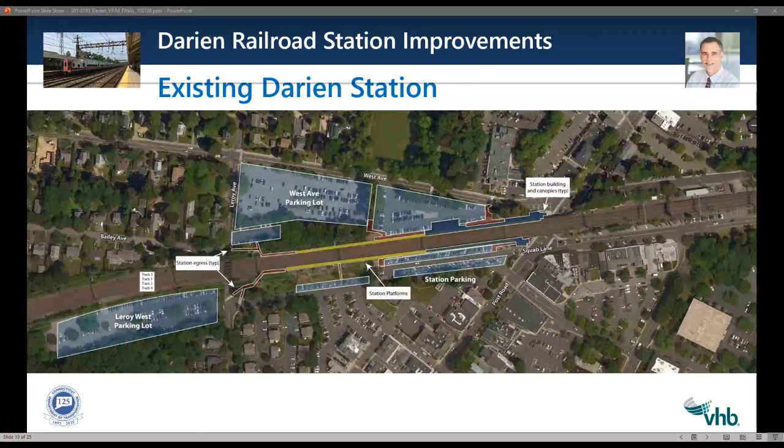This all sounds pretty good. So why are we here?

In 2016, the Connecticut Department of Transportation commissioned an assessment of 43 of Connecticut's commuter rail stations. Under the program, an evaluation, visual inspection, and limited physical testing of items such as the platforms, canopies, and station buildings was conducted. This included evaluations of architectural, structural, mechanical, and electrical systems, as well as a check of ADA elements for compliance. The information collected from the assessment was used to establish current conditions at each station in order to develop a prioritized repair and improvement program.

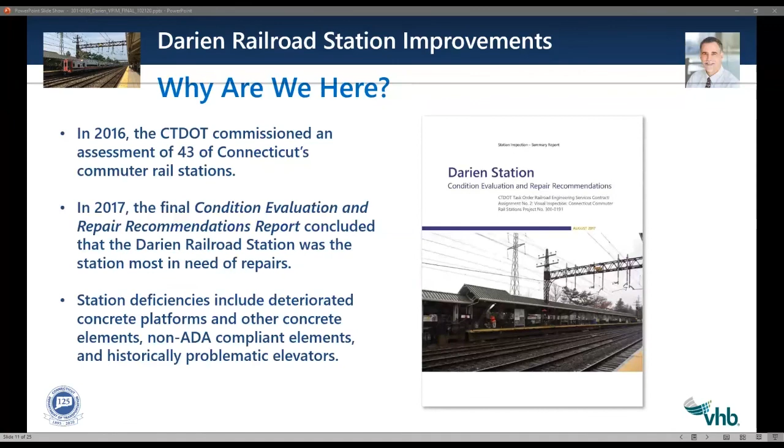In 2017, the final condition evaluation and repair recommendations report found that the Darien Railroad Station ranked as the station in most need of repairs. At the Darien Station, deficiencies include deteriorated concrete platforms and other concrete elements, such as the platform foundations, non-ADA compliant elements such as ramps with greater than allowable slopes, and historically problematic and often out of service elevators.

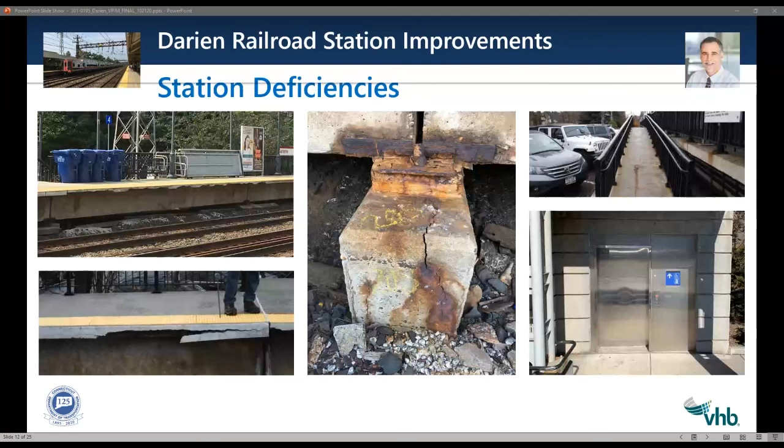As part of this project, we are going to address those deficiencies, and then some. Highlights of the proposed project construction include the following: replacement of four catenary structures within the project limits. This includes the structure at the east end of the project, which will be reconstructed on the outside of the platform and canopy. The existing concrete double T platforms are proposed to be replaced with electric heated fiber reinforced polymer, or FRP, transit panels.

For those of you familiar with Noroton Heights, a similar approach will be taken here, with the exception that at Noroton Heights, non-heated precast concrete panels were installed. I'll go into more detail on the heated FRP transit panel system in a few minutes.

The existing concrete stair and ramp structures to and from the platforms will be replaced with heated FRP systems. The landings for these stairs and ramps will also receive a heated FRP overlay to prevent icing conditions. New guardrails and handrails will be installed on the platforms, ramps, stairs, and walkways to ensure ADA compliance.

Both existing electric traction elevators will be replaced with more robust hydraulic units, which will also require the installation of new, larger machine control rooms. In addition, a full-length windscreen vestibule system will be installed at the elevator entrances.

All existing platform and canopy signage will be replaced with new signage meeting current requirements. All existing platform, ramp, and stair lighting will be replaced. In areas not covered by canopies, new freestanding poles will be installed off of the platforms and will utilize LED fixtures. Lighting attached to the existing platform canopies to remain will be replaced with new LED fixtures.

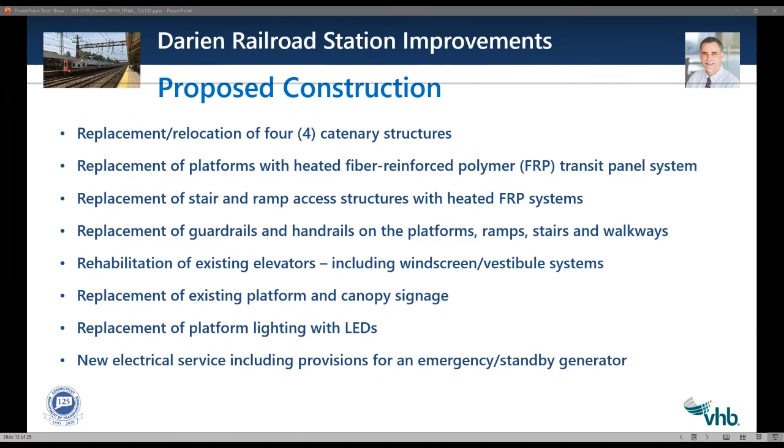Proposed Construction Plan 2 shows an overview of the east half of the project. As with Construction Plan 1, the new catenary structures are shown in dark blue, the heated FRP platforms in yellow, heated FRP stair and ramp access structures in light blue, concrete sidewalks with heated FRP overlay in purple, and new concrete sidewalks and stairs in orange. This slide also gives you a better feel for the extent of the new concrete sidewalks being proposed.

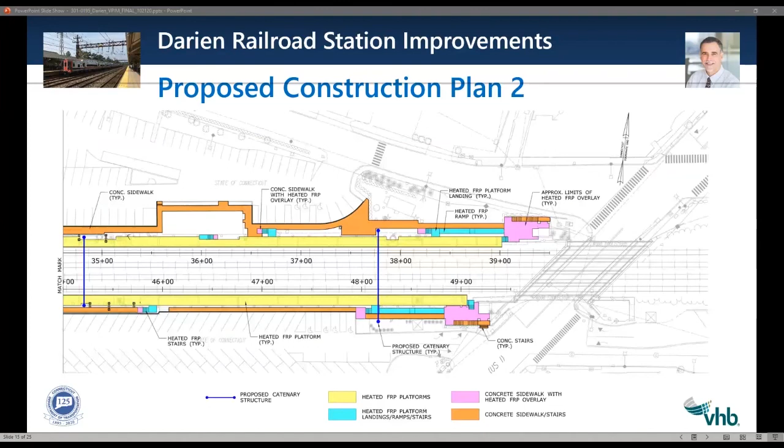As mentioned earlier, one of the elements unique to this project is the use of electric heated FRP transit panels for the platform surface. In the section on the left of this slide, it looks similar to what was done at Noroton Heights, in that the existing platform foundations will be repaired, new concrete pedestals will be built, and a steel stringer system will be installed to support the platform surface, in this case, the FRP panels.

The exploded view on the right gives you a better idea of the heated FRP transit panel system itself. 2 foot deep by 4 foot wide individual modular FRP units sit inside 10 foot deep steel panel frames. Each modular FRP unit contains an integrated heating membrane and a textured non-slip walkable surface.

The only exception is the unit at the front, or track side, of the platform, which will have an FRP tactile warning surface panel installed on top. All FRP units, including the one with the tactile warning surface, will be heated.

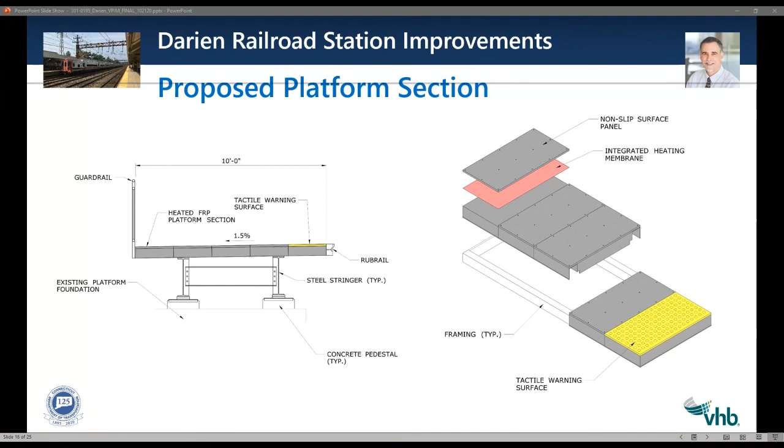Now that you have an idea of what the station is going to look like at the end, I'm sure many of you are wondering what it's going to be like during construction and how it's going to impact you. With that, let me show you how, at this time, we are planning to get there. I'll start with the construction staging and laydown area.

While coordination between the Connecticut Department of Transportation and the town of Darien is ongoing, at this time, we anticipate the contractor will utilize the extreme west end of the Leroy West parking lot. Both the contractor and the state, who will be overseeing construction, would have their field trailers in this location. In addition, the contractor would use the area to store materials and equipment throughout the duration of construction.

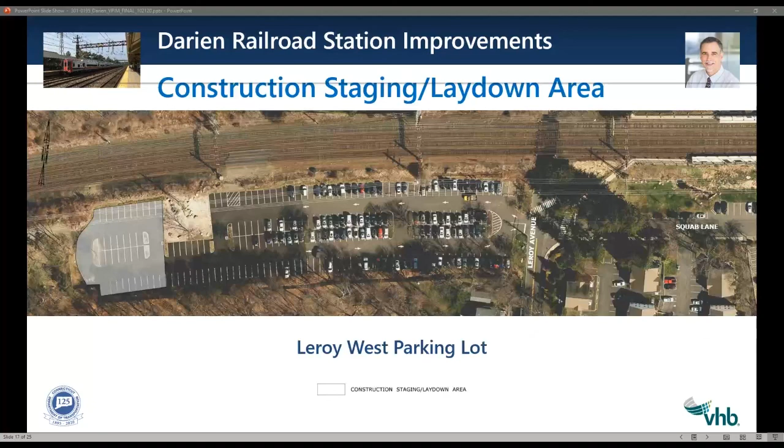Now on to the construction stages themselves. Construction stage 1 focuses on the catenary system and has an anticipated duration of 6 months. 4 new catenary structures will be built to the west of the existing structures, including relocating the easternmost catenary structure from within the platform to behind it. The wires associated with the catenary system will be relocated, and finally, the existing structures will be removed. As shown in red hatching, parking spaces on both the north and south sides of the tracks will be temporarily lost in this stage to accommodate the work.

Construction stage 2 focuses on the removal and replacement of the existing platforms and access structures on the east half of the north platform. With an anticipated duration of 7 months, this stage also includes construction of new elevator machine rooms on both the north and south sides, rehabilitation of both the north and south elevators, including installation of full-length windscreen vestibule systems, and installation of the north side electrical service, including provisions for the emergency standby generator.

As well as other incidental works such as new canopy-mounted lighting. This stage requires a temporary loss of parking spaces on both the east and west sides of the existing station building. Of note is that both elevators will be out of service for the duration of this stage.

With the east half of the north platform and rehabilitation of both elevators complete and open to the traveling public, construction stage 3 focuses on the removal and replacement of the existing platforms and access structures on the west half of the north platform. With an anticipated duration of 6 months, this stage also includes other incidental work such as sidewalks and new light poles and fixtures. Parking spaces west of the existing station building will be temporarily lost in this stage to accommodate the work.

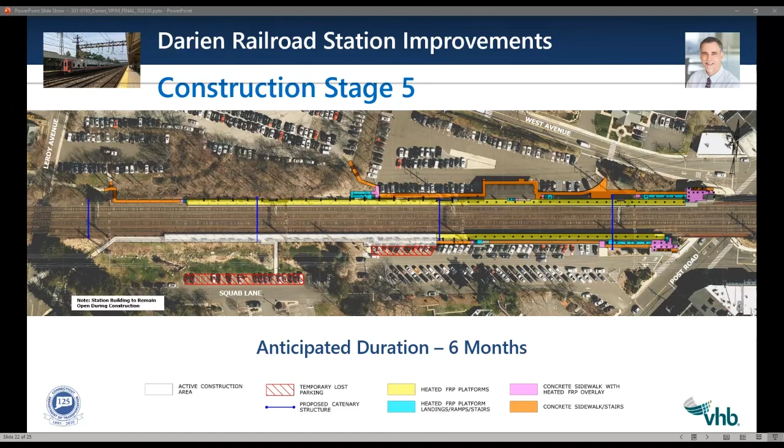With the east half of the south platform complete and open to the traveling public, construction stage 5 focuses on the removal and replacement of the existing platforms and access structures on the west half of the south platform. With an anticipated duration of 6 months, this stage also includes incidental work such as sidewalks and new light poles and fixtures. Parking spaces behind the platform, as well as along Squab Lane, will be temporarily lost in this stage to accommodate the work.

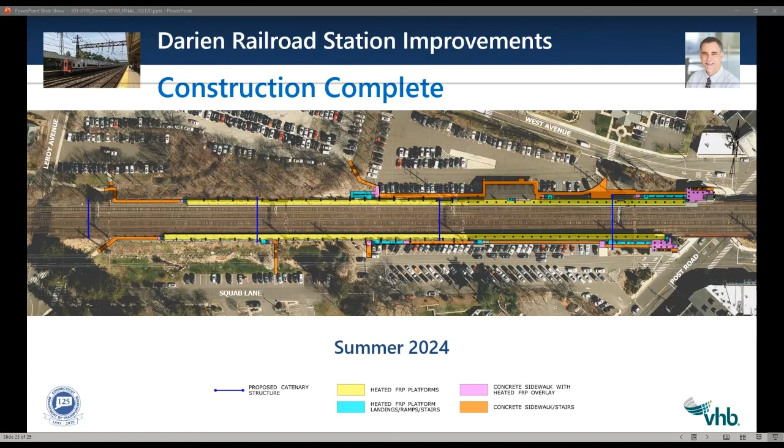At this time, construction is anticipated to be complete by the summer of 2024, which brings us to the project schedule. The project is currently in the semi-final design phase, with the 60% design expected to be submitted by the end of the year. Design completion is anticipated in June of 2021, at which time the contract documents will be processed by the Connecticut Department of Transportation and the project put out to bid. Contractor notice to proceed is anticipated in November of 2021, and construction is expected to start in February of 2022. Based on the durations noted in the previous slides, the construction completion date is currently estimated to be July of 2024. I will now turn things back over to Yuri for the question and answer session.

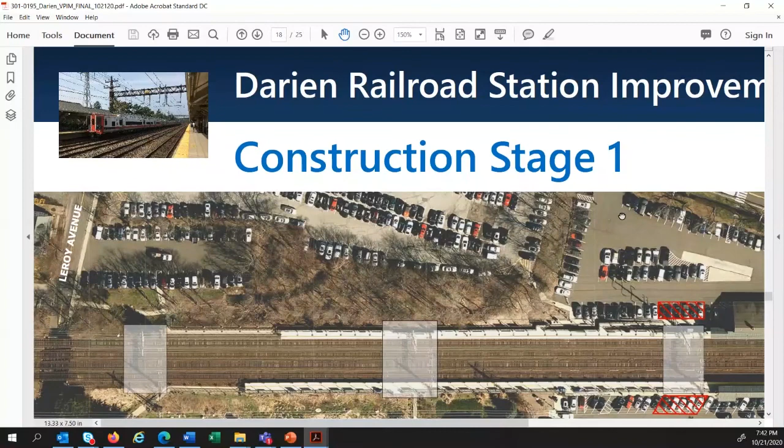So the existing utility shed storage building is located right where my cursor hand is right here. The proposed generator is going to be located approximately just 10-15 feet behind here, in the area where my hand is. So on the north side, between West Avenue and the platform on the north side with the canopies. There will be some impact to the trees in that area to put that in there, but there is going to be a landscape mitigation plan that will take care of that.

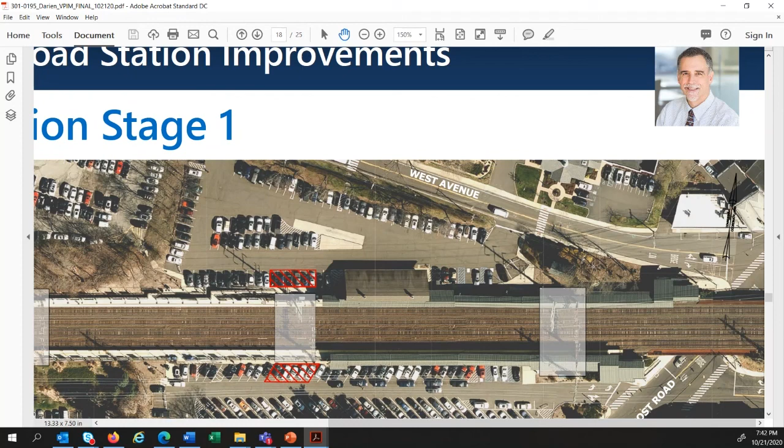Thank you, Tony. Do you want to expand a little bit, Tony, about the purpose of the standby generator and a little bit about what we plan on doing there at Darien? Sure, John, no problem. As I mentioned earlier, there's going to be 2 new electrical services, one on the north side and one on the south side, to feed the lighting for the platform.

The electric heated FRP transit panel system will also be fed from the service. And then miscellaneous electrical, there will be convenience outlets for Metro North's use on light fixtures and other little items such as that. So the emergency generator will be located on the north side, but it will provide backup power to both the north and south sides. As I mentioned in the earlier presentation, it will not provide heating for the platform - the load is just too much for a standby generator - but it will provide emergency lighting, not just to the levels required for emergency lighting. It will be providing full lighting all the way on the platforms and down the ramps and stairs to the public way. It will also be tied into the station building to provide heat for the building in the event of a power failure.

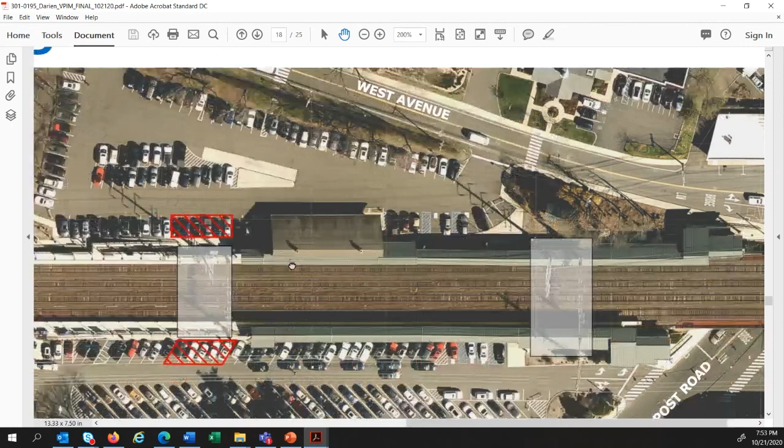As I mentioned earlier, on the north side in the area near the utility building, a portion of it will be converted into an electrical room for service. On the north side, the standby emergency generator will be located behind it. We will have a new transformer in front of it, and this area will receive all new landscaping. In coordinating with the department, we are doing work out in this area, it's sloped down at 2 to 1. There are some wetlands in this area which we will be staying away from. However, there is the potential for some impacts on the slope over here. The DOT is developing a landscaping mitigation plan to replace with equal to or better landscaping than is there today.

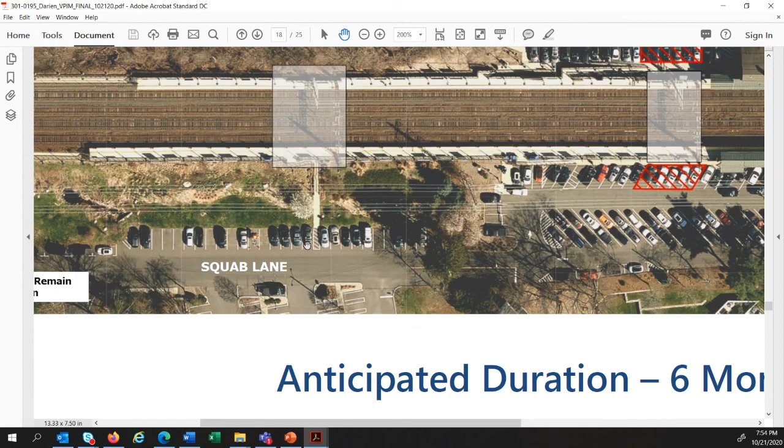There's a little bit of impact as well anticipated on the northwest end, but all landscape disturbed will be replaced.

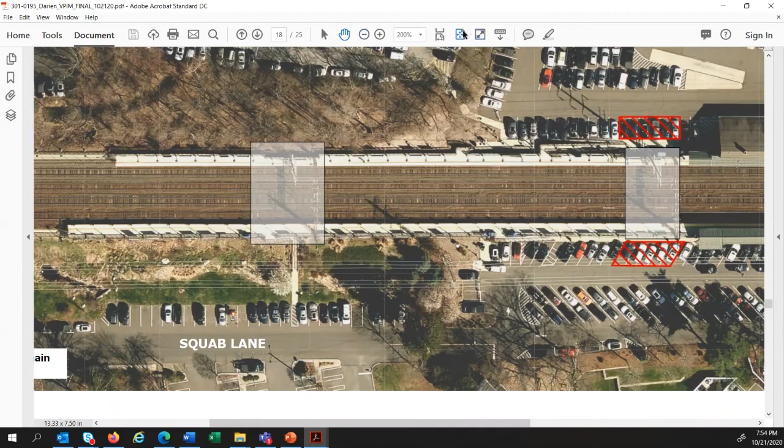Thank you, Tony. Next question came in via chat from Jim Cameron: the elevators have been very problematic at Darien Station. Will the new ones be more reliable? Who will maintain them? This will probably be another multi-team member approach to answer, but taking the lead will be Tony Sardilli.

Yes, the new elevators, we will be replacing the existing electric traction elevators with more robust hydraulic units. This requires new machine control rooms to be installed up on the platform level, and they're definitely a more robust elevator than what is out there today, designed for harsher environments. We're also going to be installing full-length windscreen vestibule systems to provide additional protection.

Out there today, those elevators are really battered by the elements, and it's not helped. I understand that they've been out of service a lot, and they're historically problematic. So yes, the new ones will be better and more reliable.

If I may add to that, and to the answer about who will maintain them - just so you know, Jim, it will be the town of Darien. We have a good relationship. Right now the maintenance and operation is being managed by the town of Darien, so we are not making any changes to that.